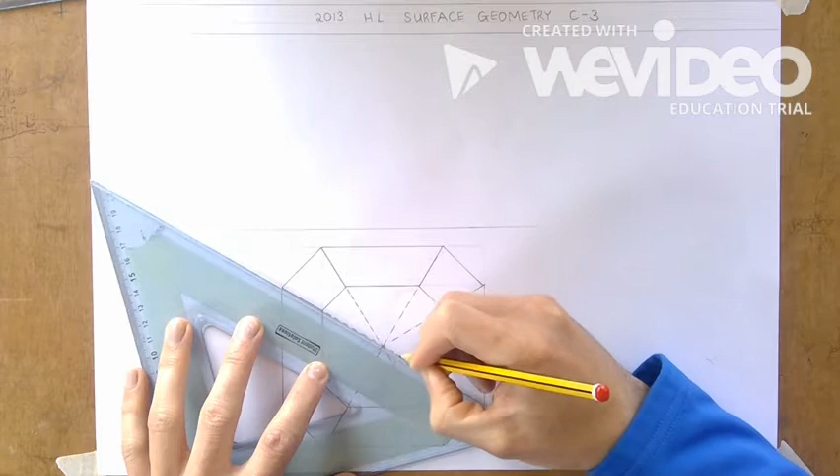Okay, so that's the plan view of the diamond. Now just a few things. These lines here are at an angle of 45 degrees because from the corner of the square that point is in 25 millimeters and so is that point, so it's an equal distance. So the angle must be 45 degrees, and similar with this line here.

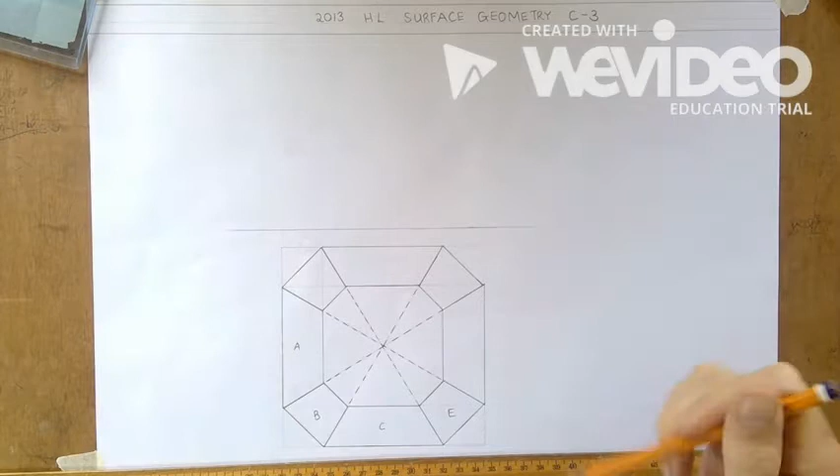So the first thing you need to do is draw the outside outline of the diamond. Then join up your opposite corners, and that will give you the inner outline of the diamond. So once you have the plan view done, the next step is we're going to draw the elevation.

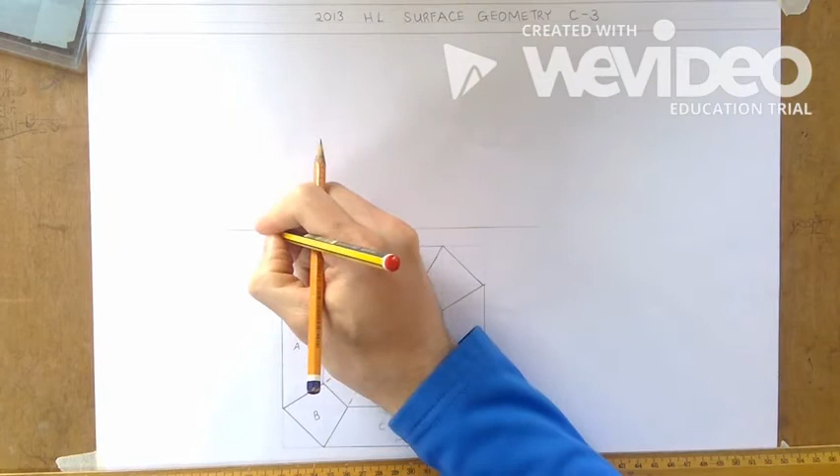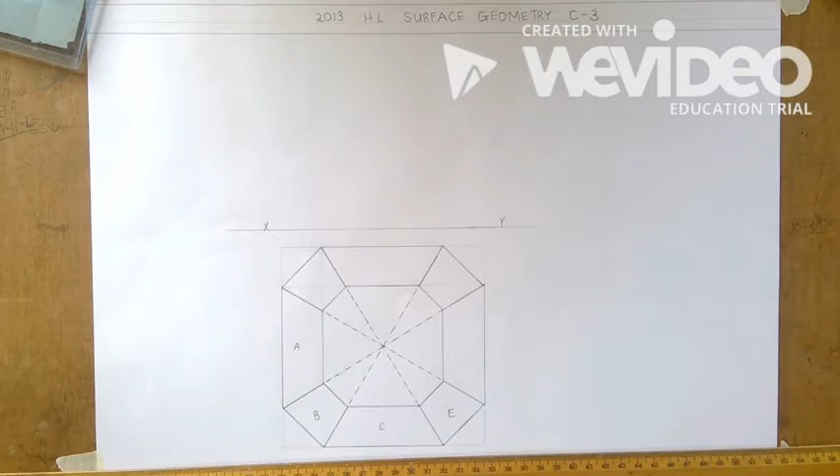So it says that surface A and C on the top of the diamond have a pitch of 45 degrees. Now I said that this is surface A here already. Okay, so we have surface A. So in elevation now we're going to be able to show that at an angle of 45 degrees.

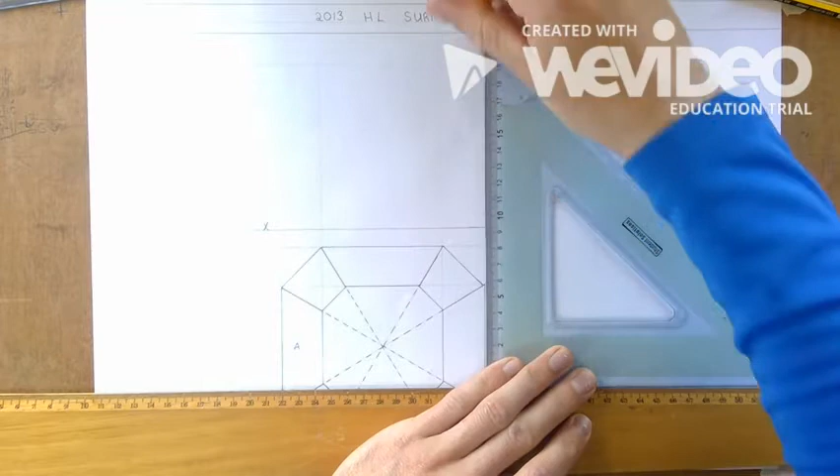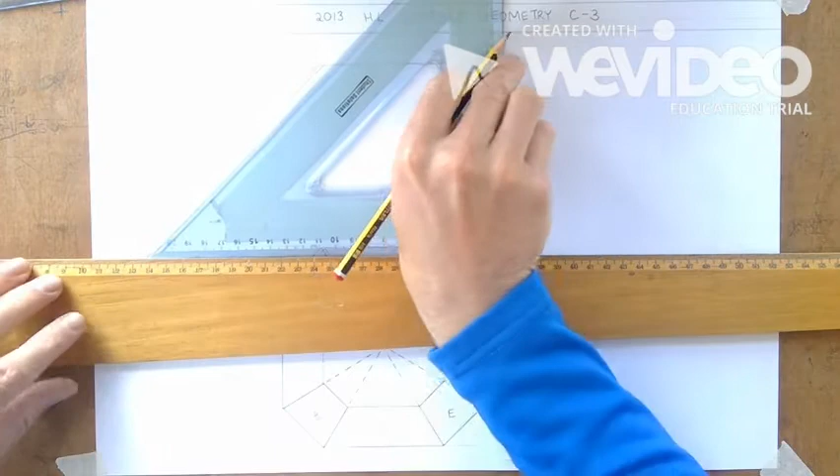Okay, so there's surface A. When you project it up to elevation, it has a pitch of 45. So we can bring that down to 45 degrees. Now that gives us that point there where it crosses A. We can bring that across then to get the top part of the diamond. And also this surface here will have the same pitch of 45 degrees. After that then we can put in surface C on the front.

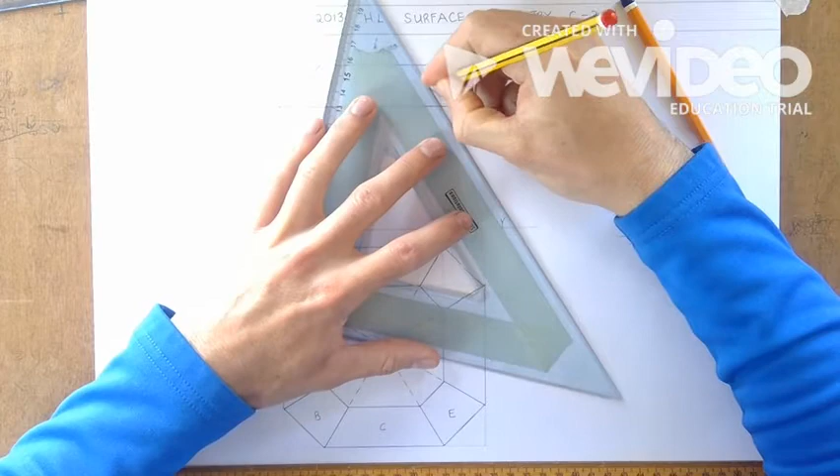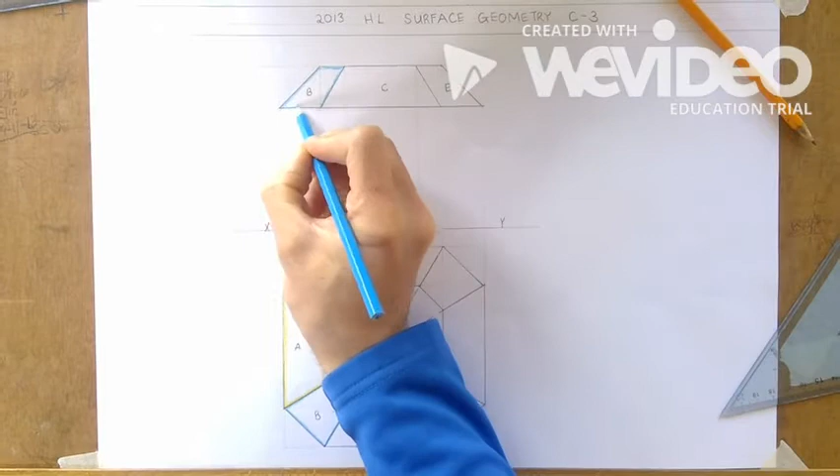Okay, so that's part A of the question completed. So part B says determine the dihedral angle between surfaces A and B. Okay, so to determine the dihedral angle, there's two steps that you have to do. Step 1, I'm going to write the steps out here.

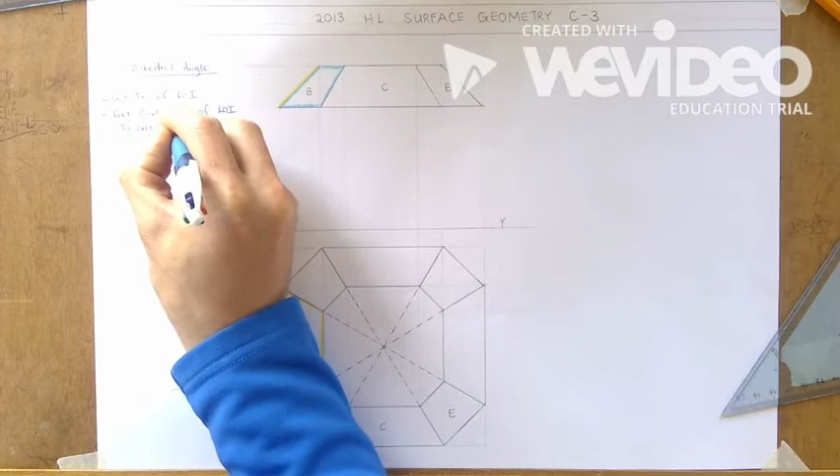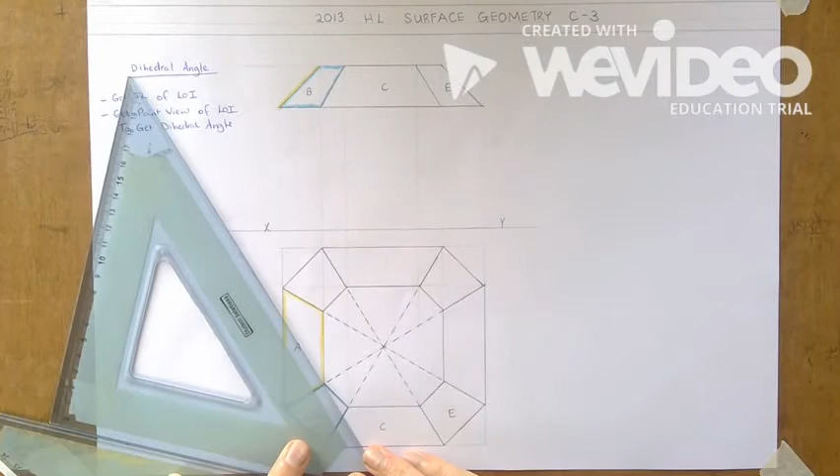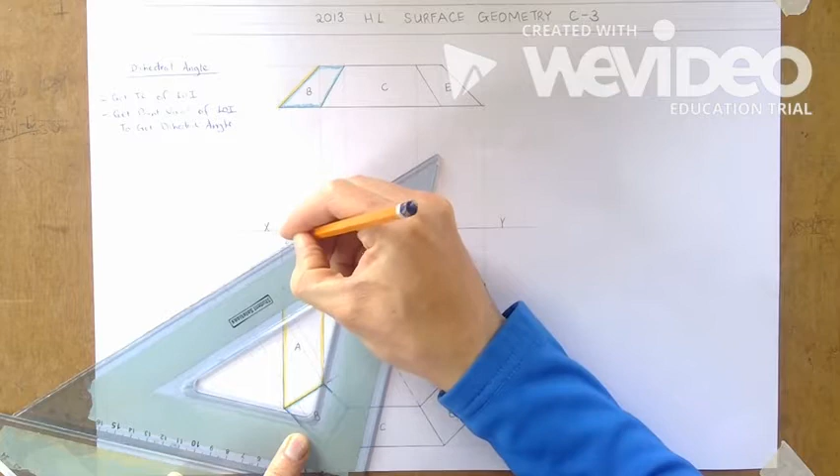This is my line of intersection here. So what I need to do now is project out a view that's looking perpendicular to that line. So using sliding set squares, my heights from my elevation of surface A and surface B.

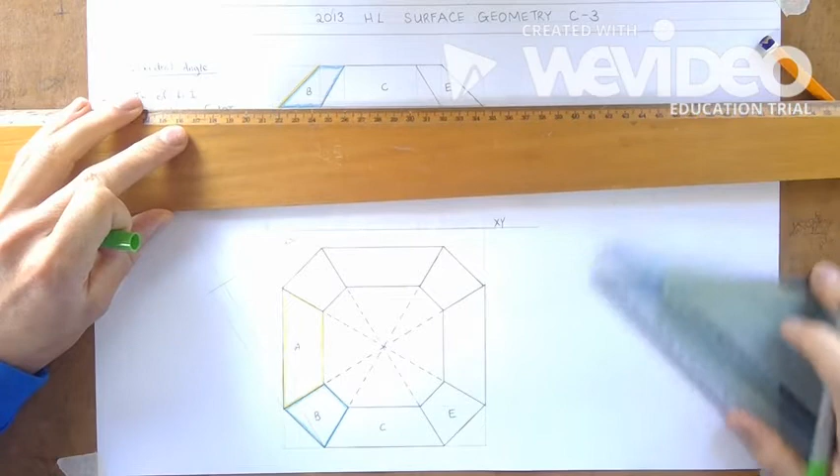Now, because I don't have the full diamond done yet, I'm going to put in a datum line. So I'm going to put in a datum line right there along the bottom of surface A and surface B. Yeah, so there's going to be a datum line. So now I can take all my heights for each point from that line.

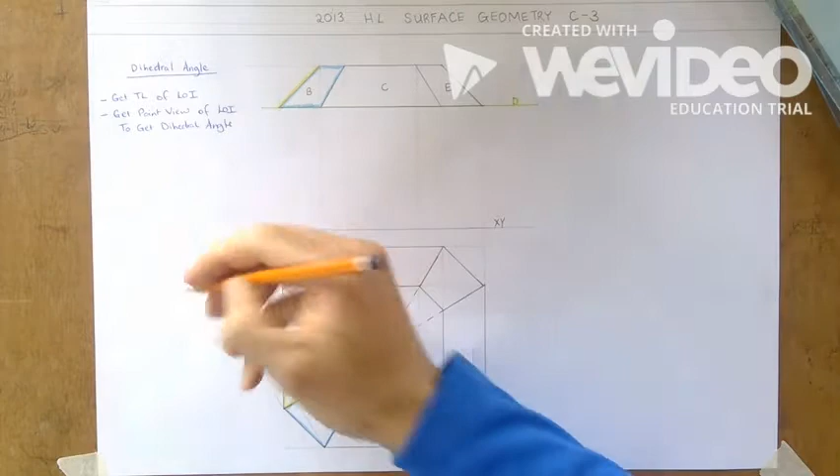So we can see that this point here is on the ground. So I can put a dot there, and that point where the other line of intersection is has that height. So I can take that height on my compass, follow that line out and mark that there. That there now is the line of intersection.

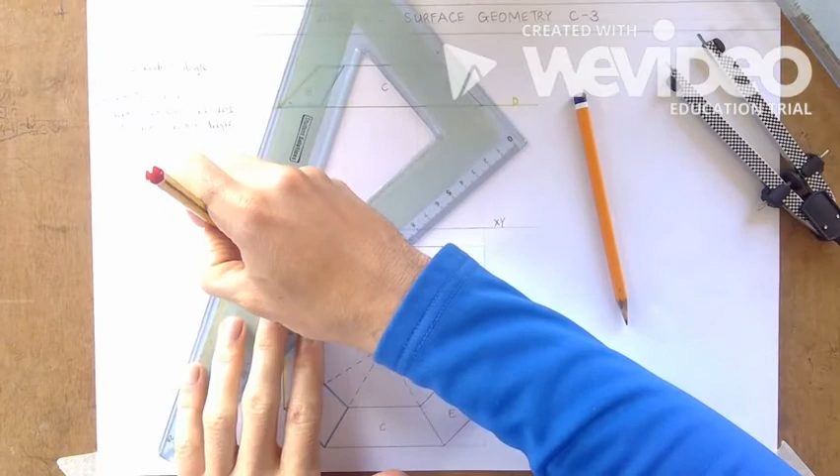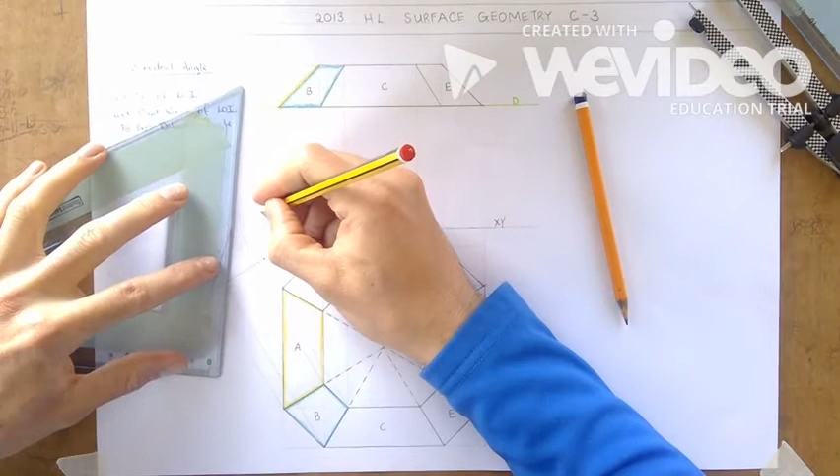This point here is on the ground, and then this point here is at the same height up as the line of intersection. Then we have this point here on surface B, which is on the ground. And then we have this point here, which is up at the height.

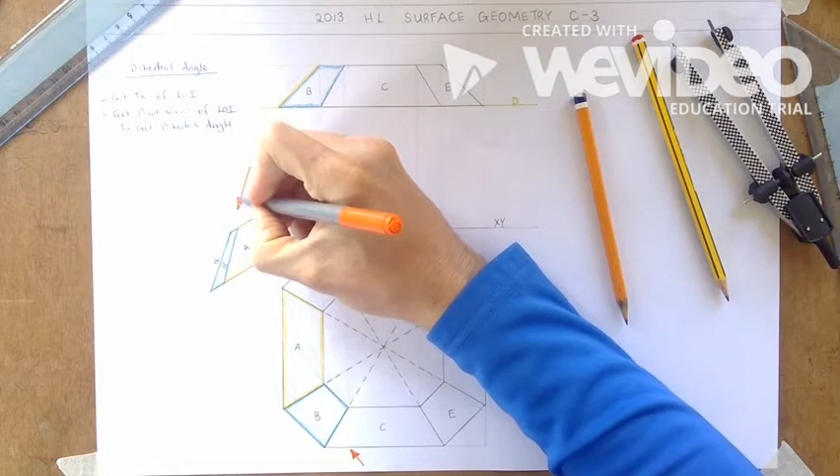So just to recap, the first thing I did was I looked up this way. Okay, and now what I'm going to be doing is I'm going to be looking down this way along my line of intersection because I want to get a point view of it. So again, set up your sliding set squares.

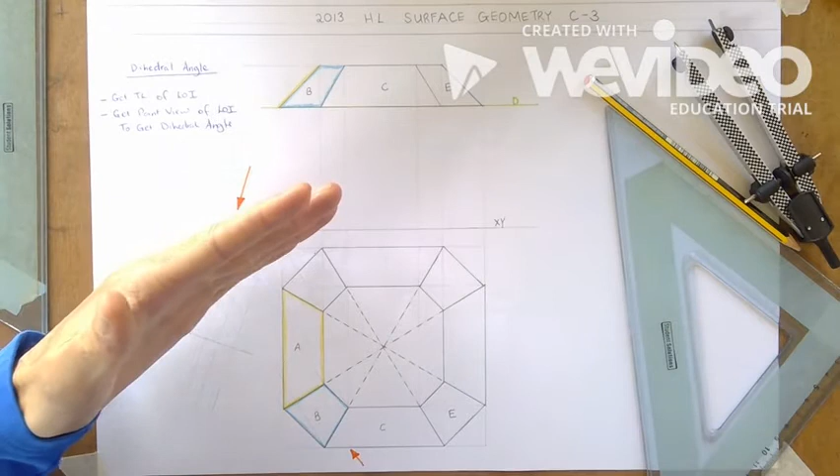Now, when we're putting the measurements on this view, we always have to take them from two views back. So that's one view back, this is the second view back. So we're taking them from this view, and we're also taking them from our previous XY line. So we're on X2, Y2, so our previous one would be X1, Y1. So we're going to be putting our compass here and measuring back to this view here.

Okay, now again, just to shorten up the question so I won't run out of room, I'm going to put in a datum line through point A. And all datum lines that I put in, I'm going to put them in green.

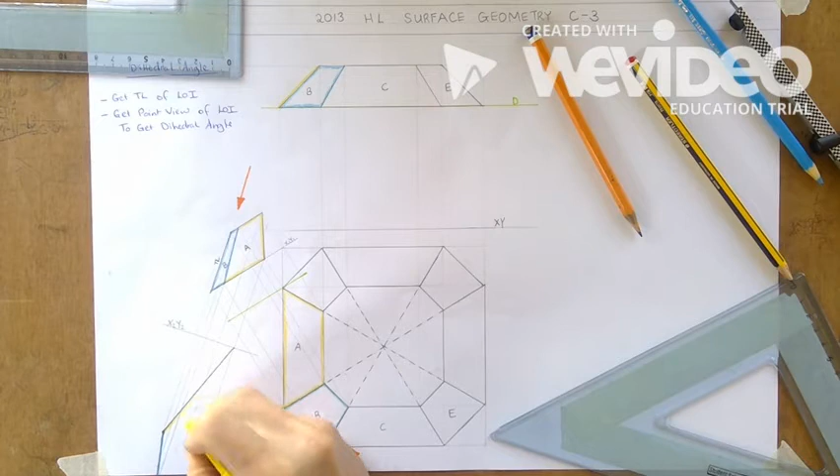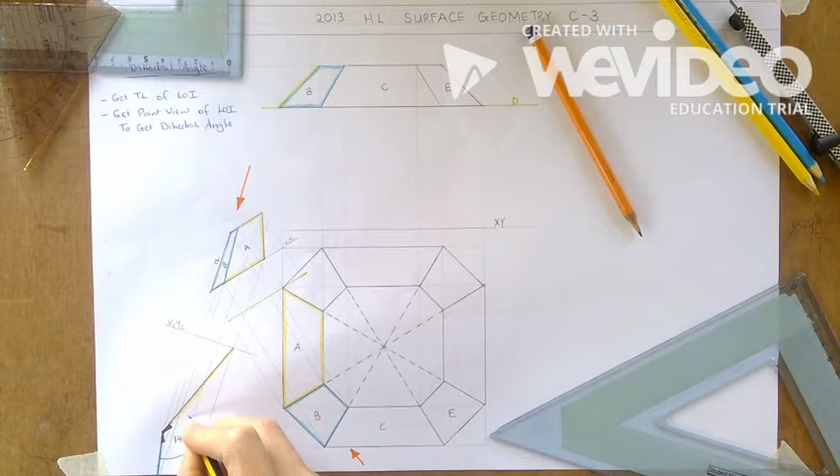So the final thing to do then is to measure the dihedral angle. So I get a measure of 148 degrees. Now just be careful, you need to put in your dihedral angle symbols. So a little triangle there, triangle there, and the angle I got was 148 degrees. So that's part B.

Part C of the question says all sloping edges of the underside of the diamond have a true length of 95 millimeters when scaled. Complete the elevation of the diamond. So the lines they're talking about there now are all the under ones. So this is the top of the diamond, and that's the very top surface. So it's the line going from here down to the point on the bottom, there, there, there, there, there, and there. So all of them have a true length of 95 millimeters.

But in the plan view, we cannot see that true length because those edges are sloped and slanted down to a point. So we have to use that information to find the true length of those lines. Now, one very important thing that will help you with this question is knowing that any line that is parallel to the XY line will be seen as a true length in the other view. So if I can show one of these parallel to the XY line in plan view, then it'll be a true length in my elevation.

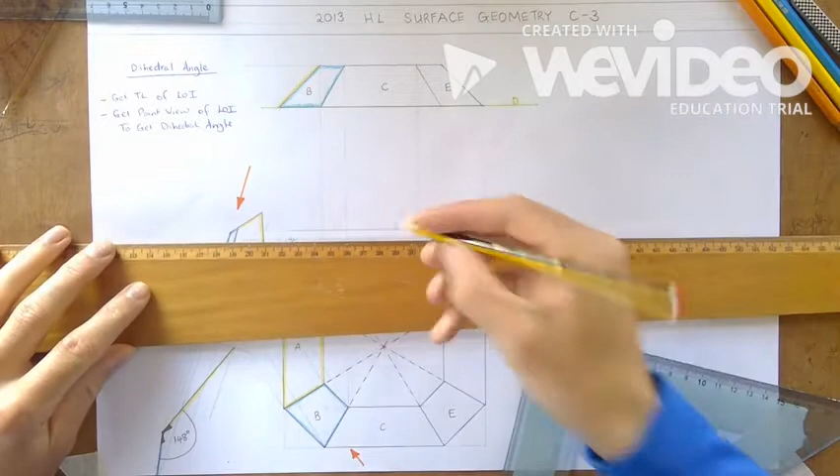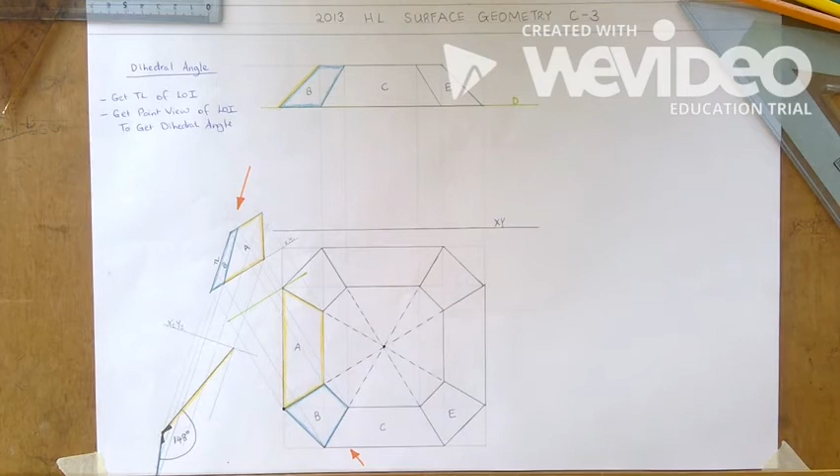So what I'm going to do is pick one of the points. Doesn't matter which one I pick, and I'm going to rotate it so that it's parallel to the XY line in plan view. So the one I'm going to take is from here into there. So I'm just going to put a dot on both of those points. And now I'm going to rotate that line so that it's parallel to the XY line. So that's it there, and then I'm going to project it up in elevation.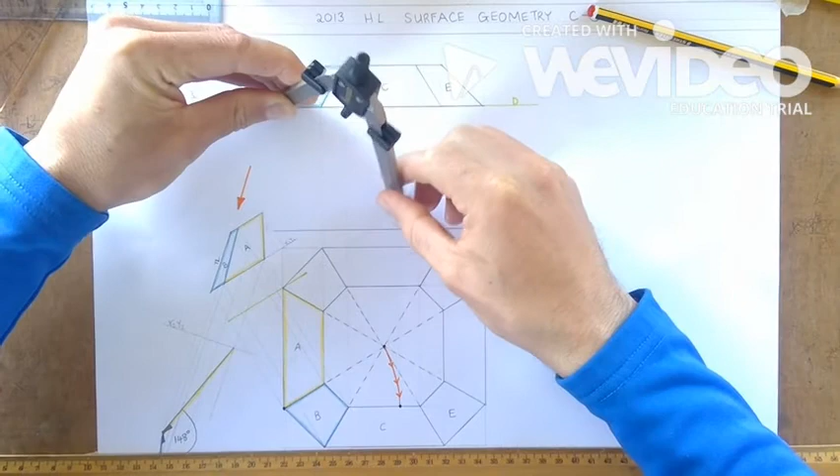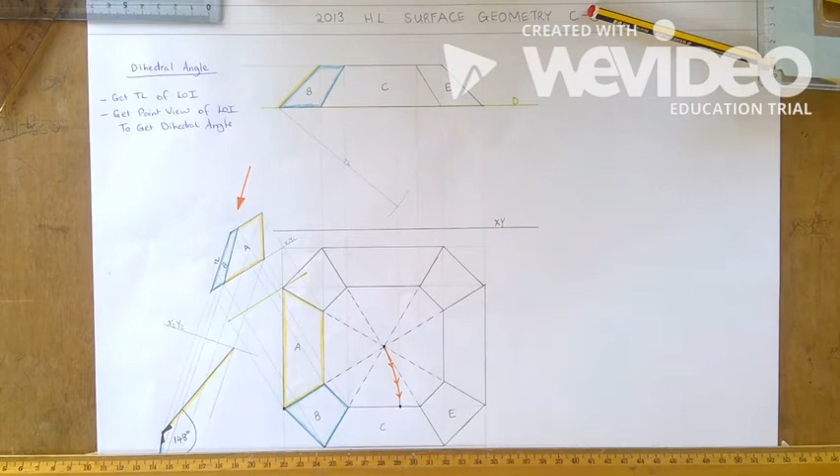I know that it's 95 millimeters. So get that measurement in your compass. From this point, which is up here, scribe an arc that's going to cut that line that you brought up, and that there then is your true length line. That line there now is true length. Now that line is not the actual position of that line in the elevation of the diamond. So what I need to do now is rotate it back into its correct position.

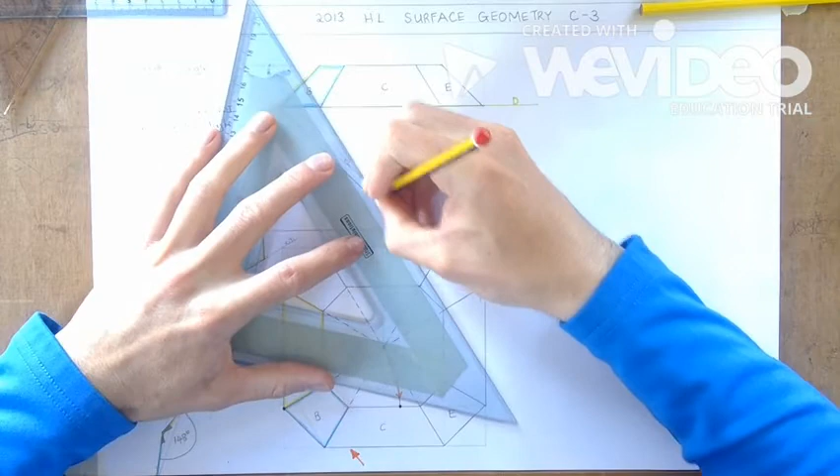So what that has given me now is the height above the XY line. So if I just bring up the center here, and then project across that point, that is going to give me the center of the diamond and its height above the XY line. I can join up my points. So the last part of the question then says determine the dihedral angle between surfaces D and F.

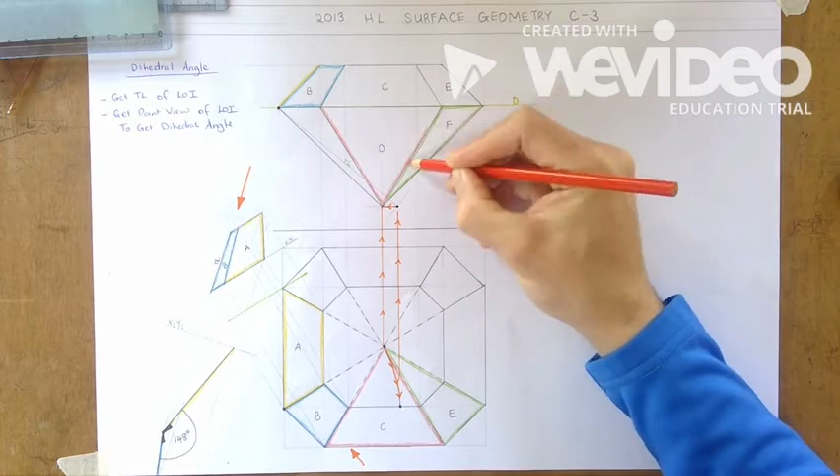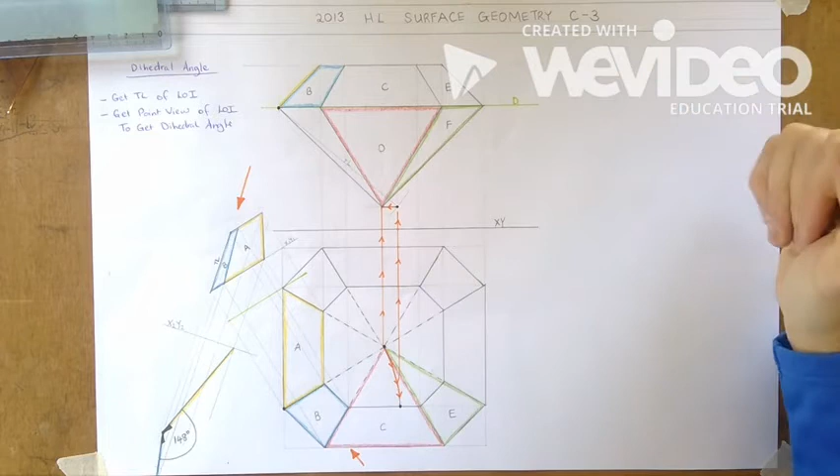Okay, so I've just highlighted surfaces D and F there. So D is red, F is in green, and you can see the line of intersection is the line that they both commonly share. So there it is in elevation, and there it is in plan view. There's surface D, and there is surface F. So again, I'm going to apply the same method, the auxiliary method approach to getting the dihedral angle.

So the first thing I have to do is get the true length of the line of intersection. That's by looking perpendicular to the line of intersection, and afterwards I'm going to get a point view of the line of intersection, and that's when I look down along the line.

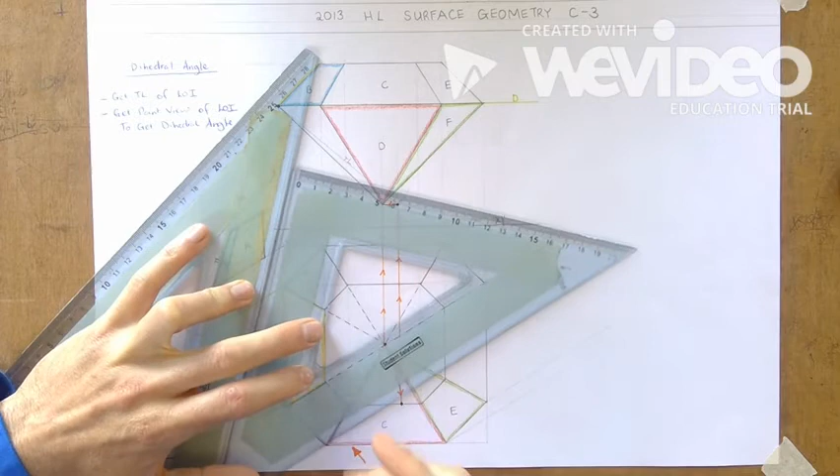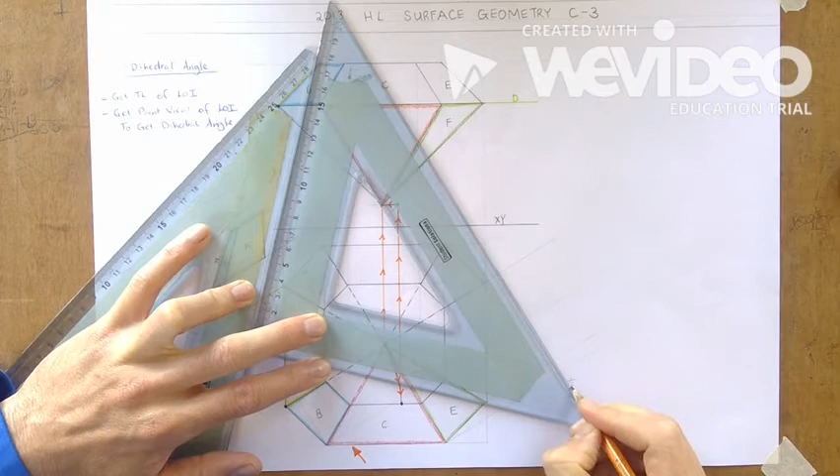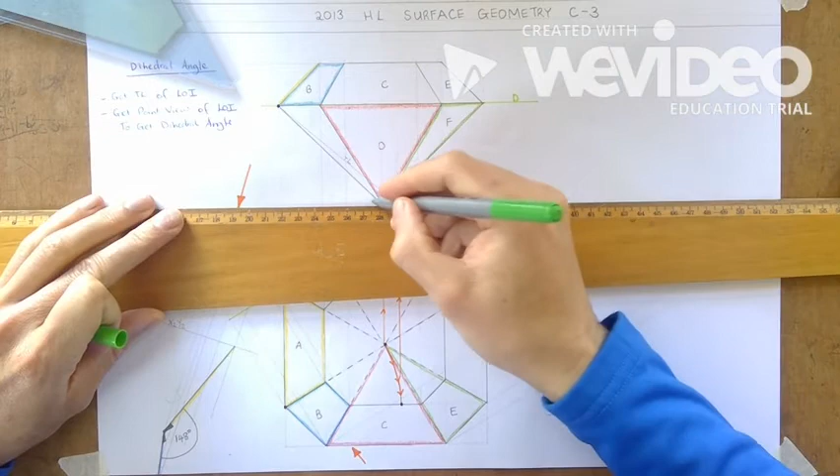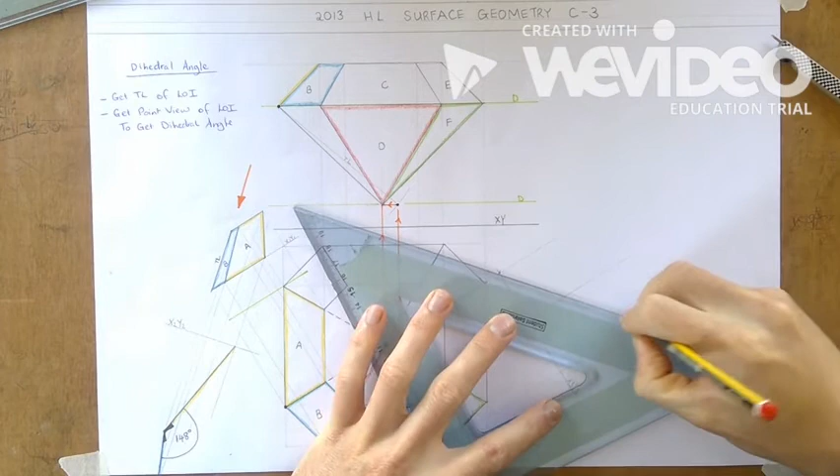So again, to sharpen up my view, I'm going to put in a datum line. This time I'm going to put it just here at the bottom of the diamond. So the common point that they both share is on the datum line, so that means it's going to be on the ground out here. And then the top of the line of intersection is going to be... join up those 2 points. Now afterwards I have to get this point, which is here, so that's up the exact same height. And then the other point here, which is at the same height as well.

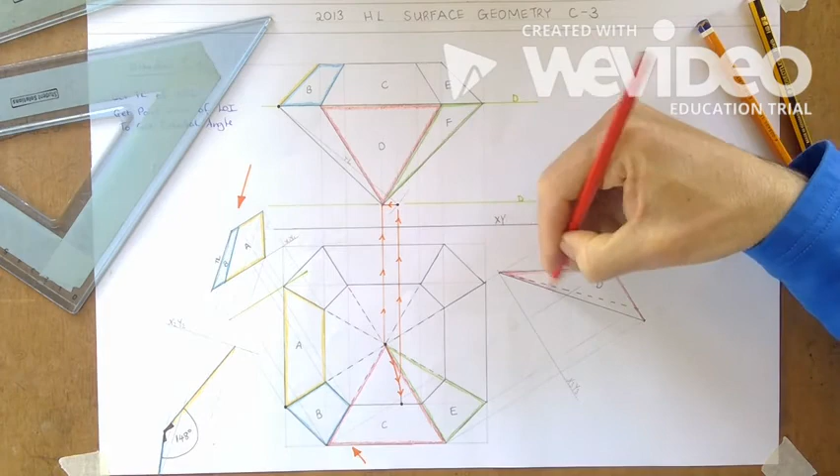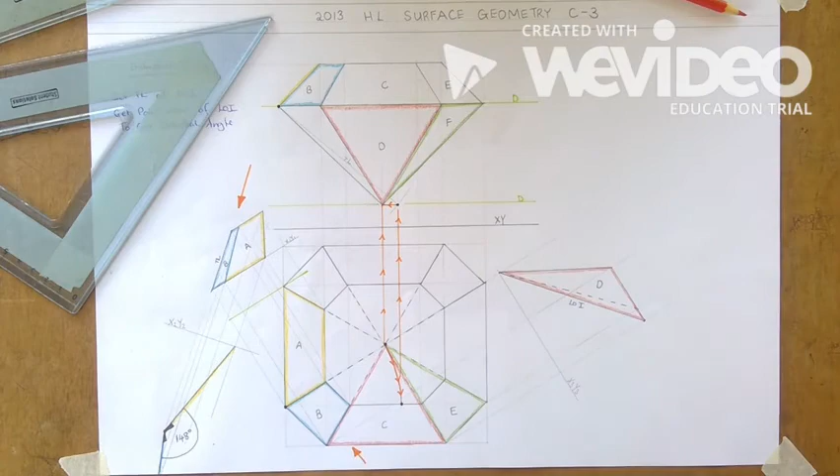Okay, so in the first auxiliary view, surface D is out to the front and surface F is to the back. So there's our surface F at the back. And here then is my line of intersection. So what I need to do now is get a point view of my line of intersection.

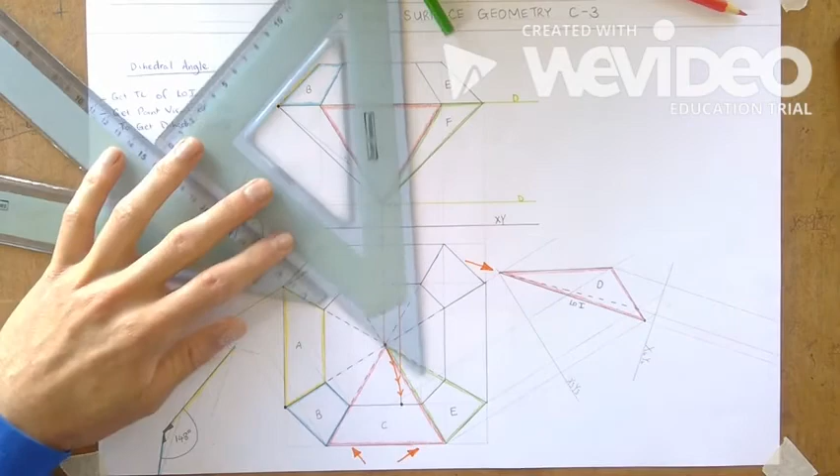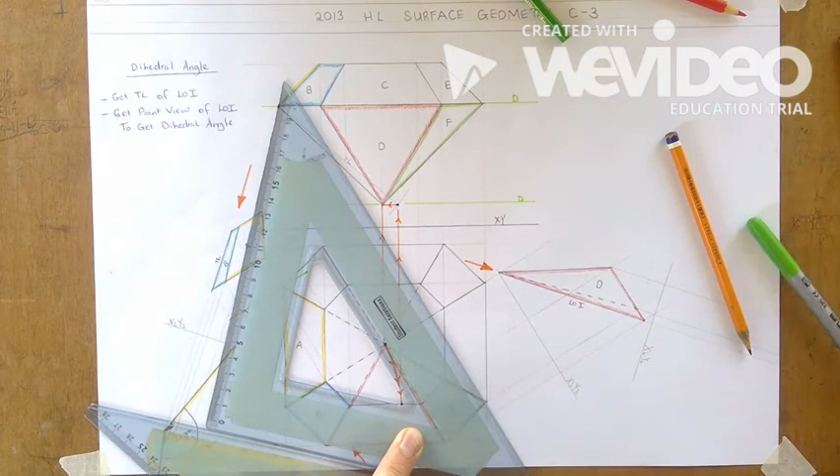And now again I'm going to put in a datum line, and I'm going to put it through the point that's closest to my x3, y3 line. Again, set up your x3, y3 line, project it back, and there's your datum line. So this point here is going to be on the ground, which is there. And then I need to take the heights for my other points.

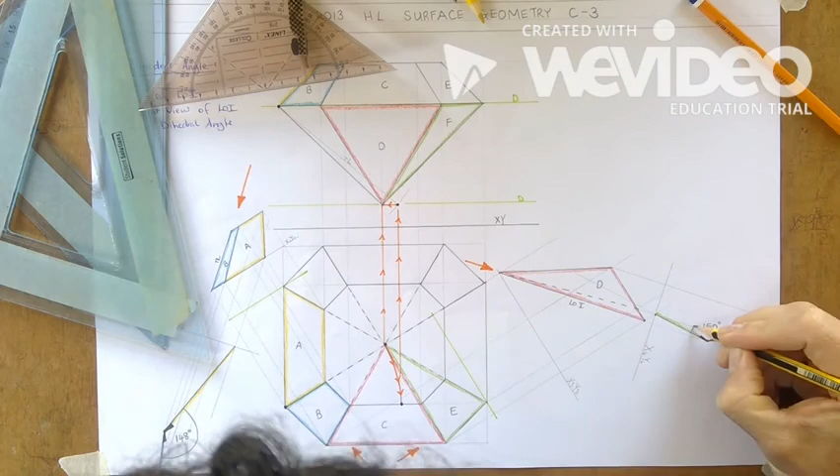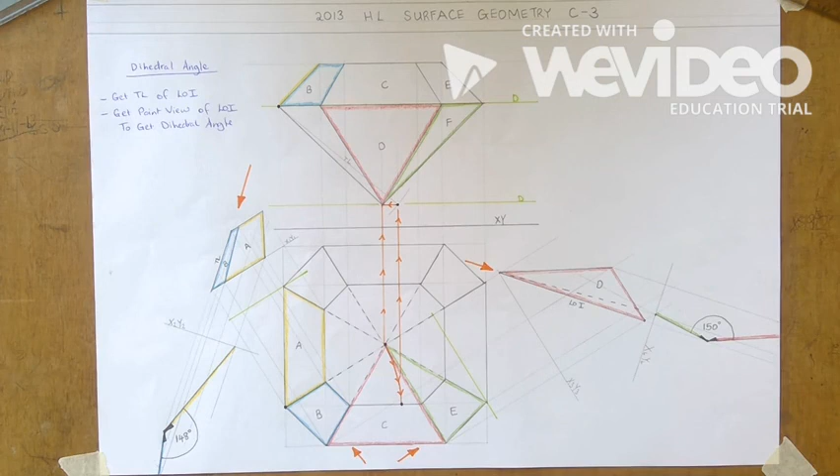So I get a measure of 150 degrees. Okay, so that's the solution to the 2013 higher level surface geometry question. I hope it helped you, and I hope now you're able to fully understand how to find the dihedral angle using the auxiliary method, and that if any line is parallel to the XY line in one view, it's going to be seen as a true length in the next view.